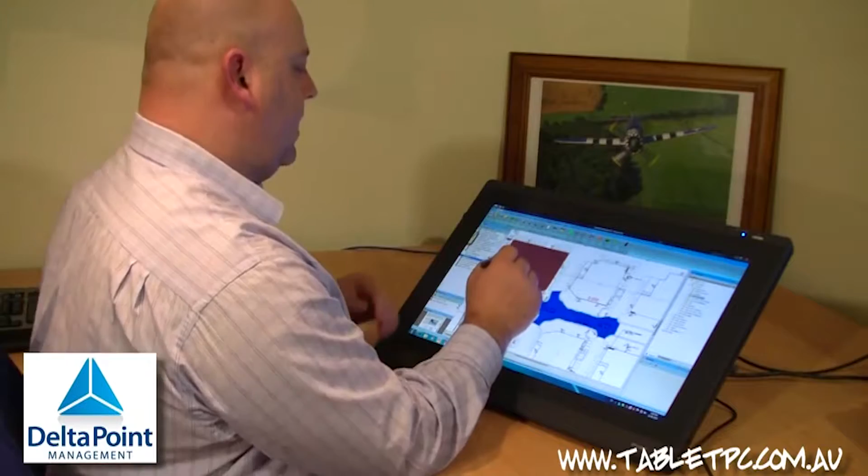So let's take some measurements. Now, what we've got here is our complete site plan, and we want to measure different parts of it. Say for example you're a concreter and you've got to measure some of this area where it's not in straight lines—here's how we do it.

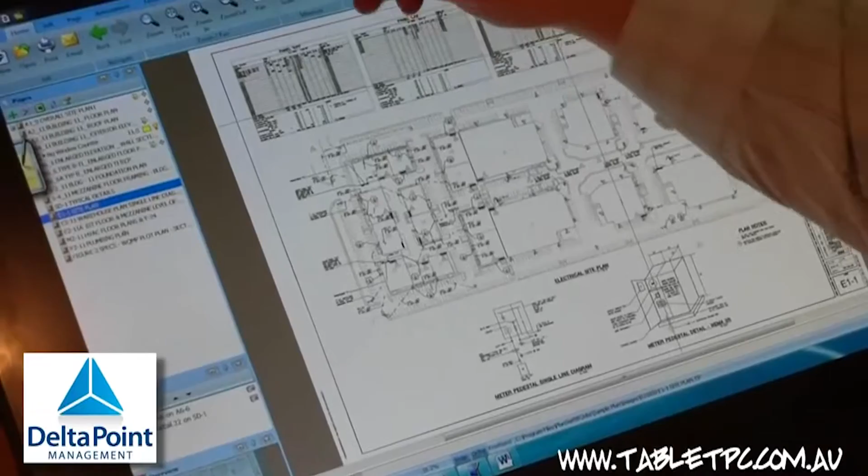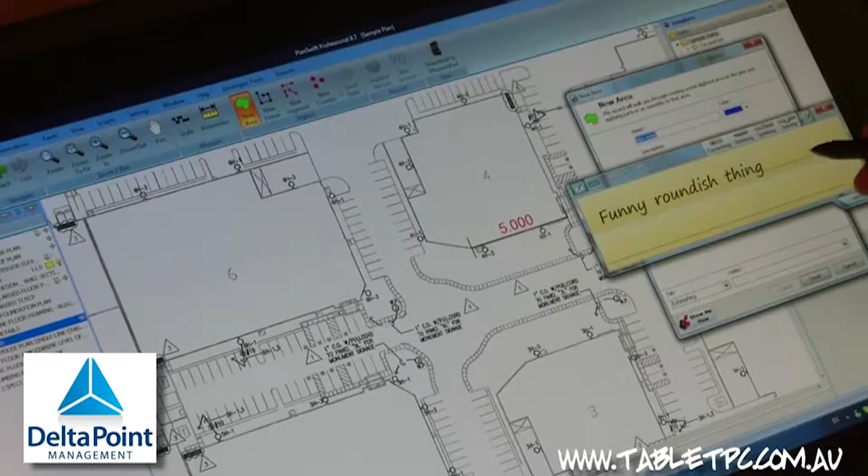So what we're going to do is zoom in. Alright, now I'm going to choose a new area and call this funny roundabouty kind of thing. Funny round-ish thing.

And we are just going to trace around. So if I click on there and go send data, that's telling me the total area is 36 meters square.

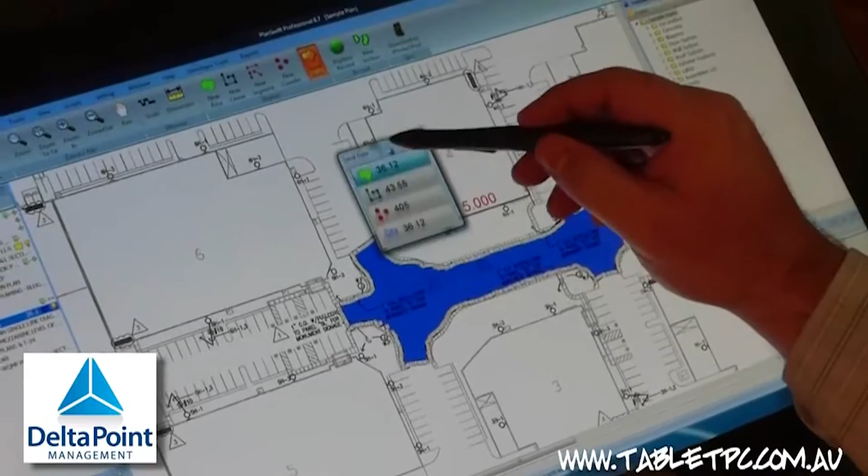The total lineal meters, so all the outside—if you need curved timbers, say for example if you're a concreter, your total lineal meters is 43.55. There are 405 little points, and in this instance the quantity is the same as the area.

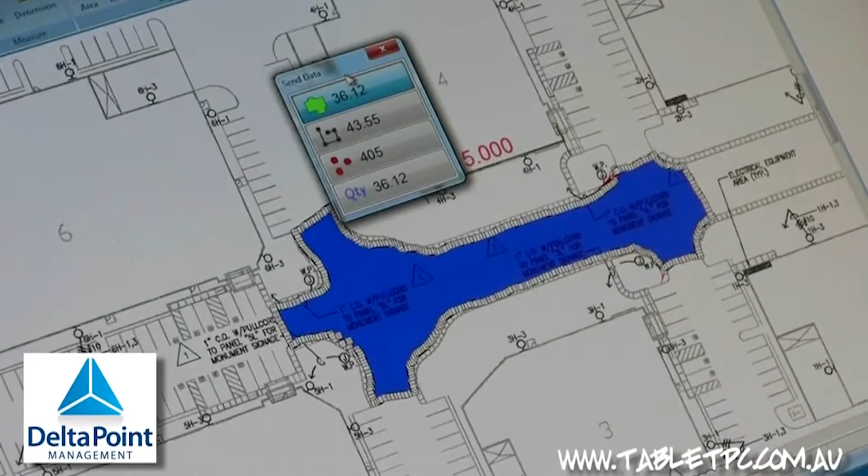So right there we've just done, in all of about 30 seconds or so, an area which is fairly difficult. From this we've got our area and our lineal meters, etc. Now, how much is it going to cost us to do this work?

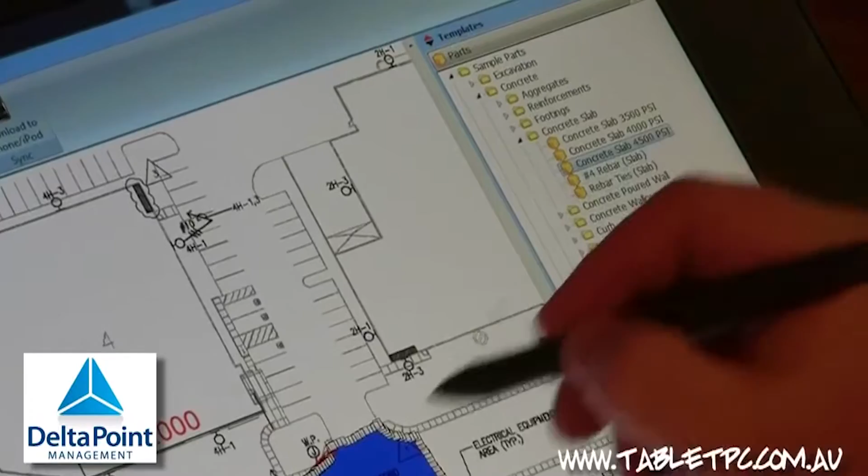Well, over here in the parts area, we've got some concrete parts already in there. So it's a concrete slab, and we assume it's going to be 4,500 psi, so we can drag that onto there. But not only that, you can say, well, hang on, what's our rebar, what's our reinforcement? So we're going to drag that onto there as well.

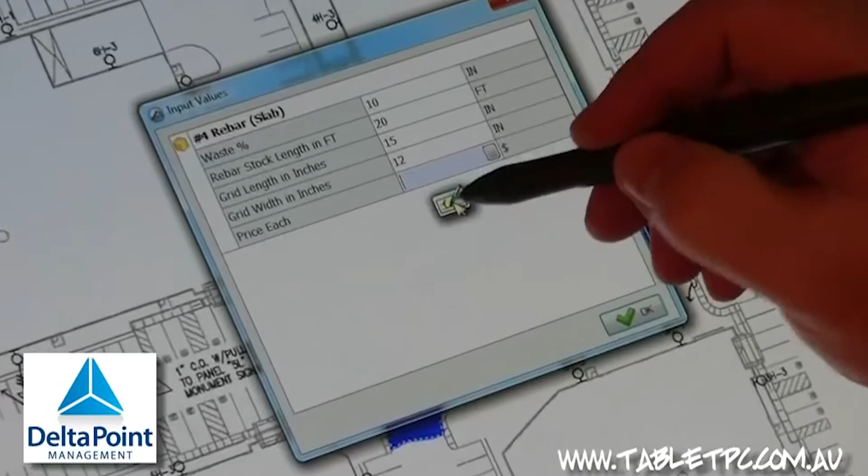Alright, we know the rebar stock length in feet is 20 feet. Grid is 15. The price per each one, we're going to say 20 bucks.

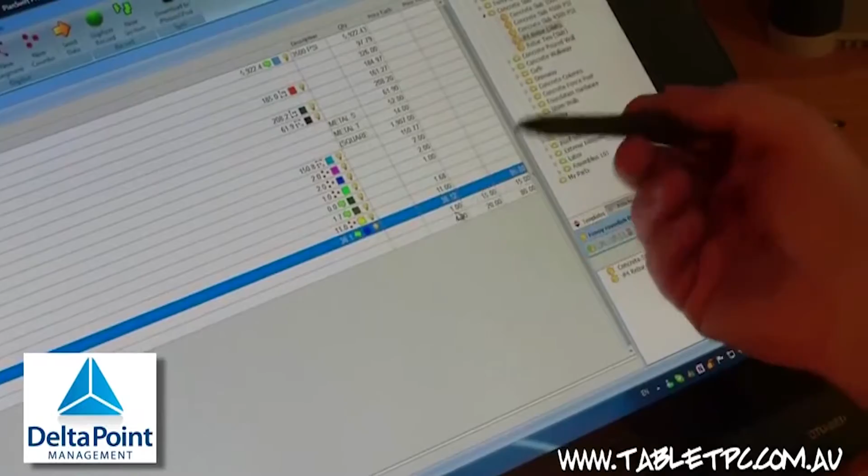Now when we come to here, we're just going to stick this back down the bottom. So in the estimating, the rebar, we've only got 4, so we only need 4 of those sheets to match that area. So at $20 each, there's our price of $80, and the total for the funny roundish thing is $95 to this point. But you know what, we want to add in some rebar ties as well.

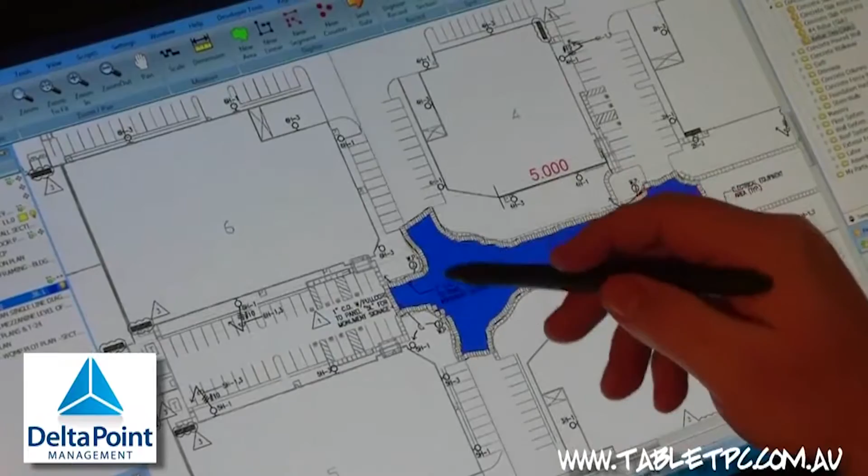And we're going to say there's no waste, so it's calculated that we need 29 to fit in there. So right then and there, you've done a really quick estimate of something which would normally take a fair amount of time to measure—and guesswork, yeah? And guesswork, yeah, absolutely. Right.

Now, as good as Planswift is in reducing your time in quoting, we thought it could be better, because one of the things that a lot of building contractors prefer is they love their pens. You know, you see them, they walk around with their pens in their pockets or over their ears or whatever. They love their pens.

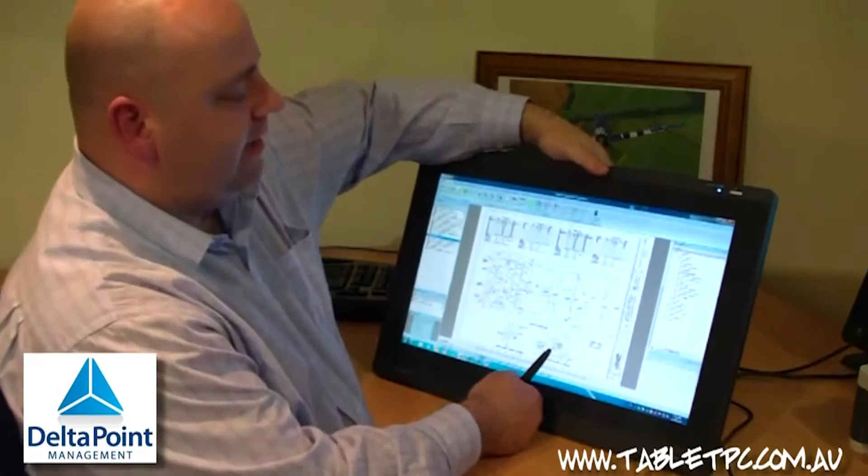But that's a bit hard to write on. Or you can lie it down at an angle like a plan table, and then basically you can manipulate it as if you were using a plan table. So for example, you can click and drag your plans, drag them around the screen like that. You can zoom in.

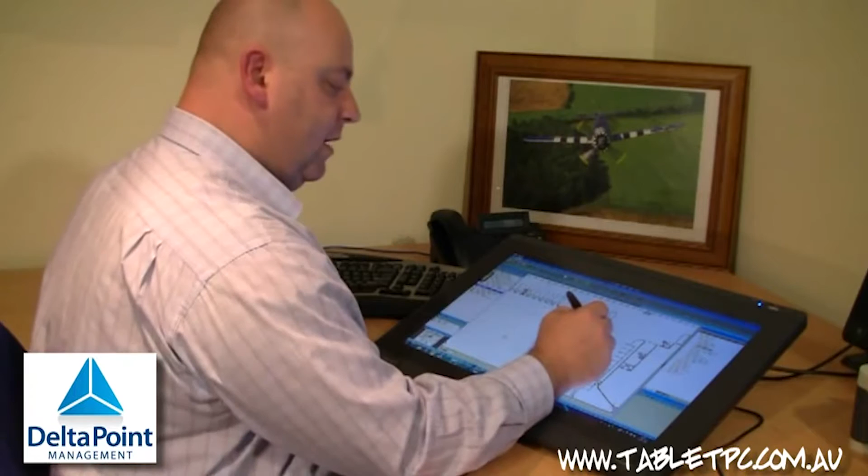Yep, you can use it with a keyboard to create wonderful things like the magnifying glass, so that you can get right in on top of the things that you need to use. Now, the beauty of the Wacom interactive pen display is that it behaves exactly like a tablet PC.

So what does that mean? Well, let's have a look at how that works in Planswift. In Planswift, you can actually put notes onto your plans.

So that's cool. We say we need a note right there, but a lot of builders aren't really flash with typing. That's okay, because here we can click on there and write it in. This is a very important note. Yep, insert that, click OK.

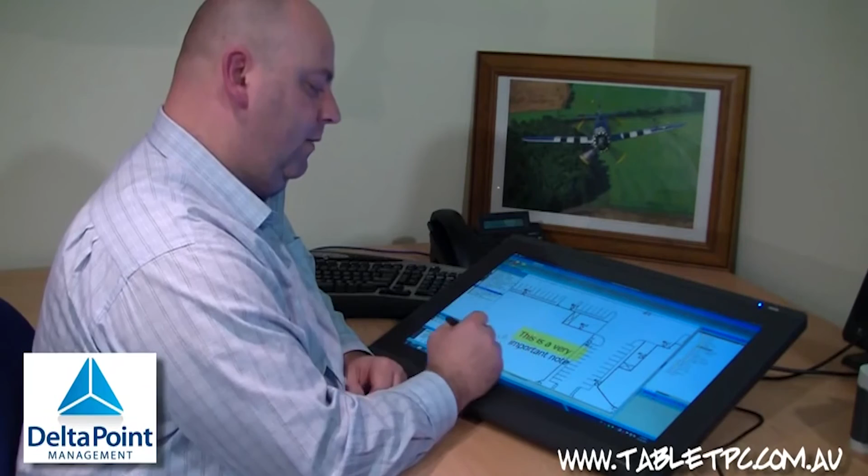There we go. This is a very important note. That means that anyone else looking at that can see that and behave appropriately. Now, how easy was that?